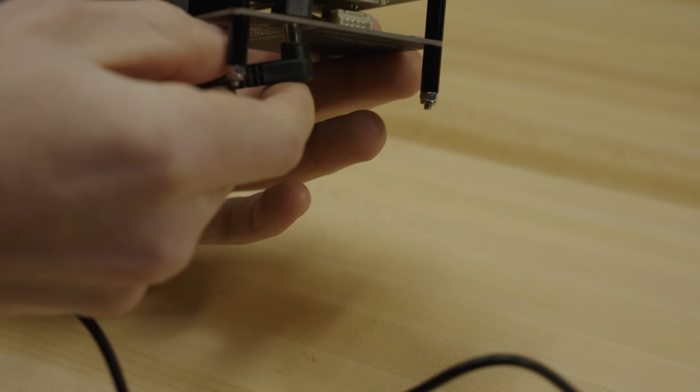This is something I built years ago. It's called the Pixel, and it's just a 16 by 16 LED matrix with APA102 2020 LEDs, which are addressable 2mm by 2mm LEDs. I was thinking, what if I made every panel of the mask its own LED matrix and made them out of circuit boards? I'm pretty sure you can get these LEDs way smaller now too.

So my plan now is to use individual addressable LEDs with individual circuit boards as each panel of the mask. The old mask is a little bit too complicated for that—there's too many faces and some are too small, it'd be impossible to solder. So what I need to do is find a more simple mask, find or make one. I think I know where I can find one, so that I can turn that into circuit boards and have it made at PCBWay, and make it that way.

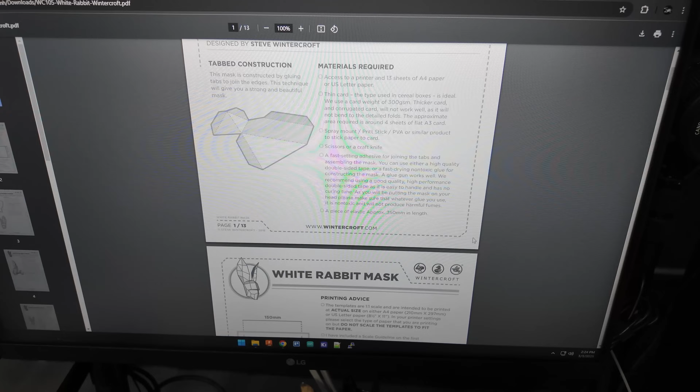I remember I found these really cool papercraft masks by Wintercroft. I wonder if they have anything. This is exactly what I'm looking for, just without the ears. So this is the mask that I purchased from Wintercroft, and I actually reached out to them and asked if I could use it for this project.

So you can see it's a bunch of paper templates that you print out, but that's not going to be useful for me. What I need to do is take those paper templates, somehow import them into Fusion 360, and then reassemble it in Fusion 360. The reason I need to do that is because I'm probably going to have to change some dimensions a little bit, and also I have to turn it into a file that I can import into KiCad so that I can put LEDs on it.

So what I'm going to do is kind of import them, mess around in Illustrator, make them so that I can import them as a sketch and then kind of extrude them and then go from there trying to put them together.

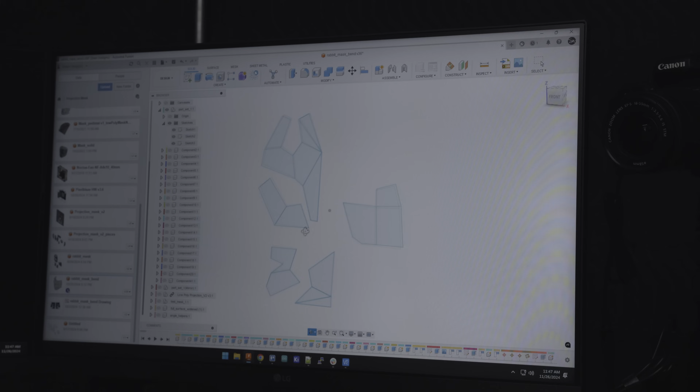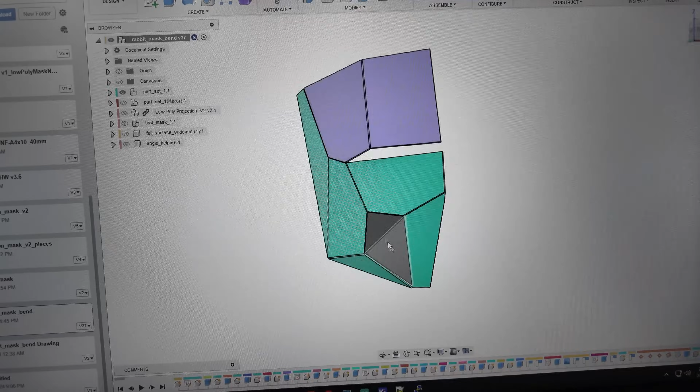And after piecing them all together, this is what I end up with. This is half of the mask. I had to recreate some of these, change their shape a little bit, because it's really hard to kind of assemble random angles. Like all these angles are just kind of, someone created it without thinking about the angles, so they're all like fractions of angles. So it's really hard to piece it together. When you're doing it with paper, it just naturally happens. But when you're trying to do it in CAD, it's like a nightmare.

So what happened was I got it kind of close, and then I would try and do some measurements, see if I could figure out the angle. And if not, then I just changed the piece slightly so that it fit together. So it's kind of working with planes and what you're given already, and then maybe making a new part to join and connect the dots basically.

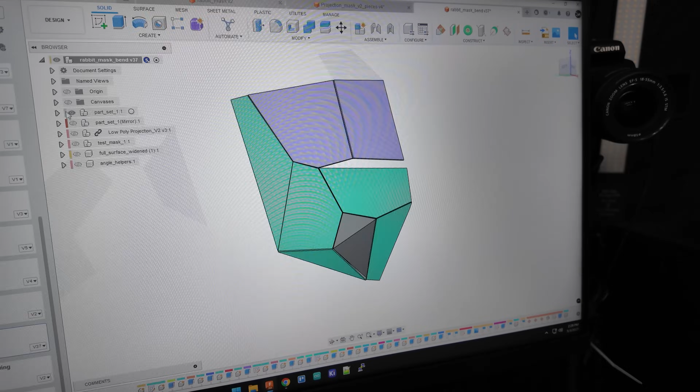So these are all individual pieces. But if I take all the surfaces, extrude them, then I can create an actual mask. So this is the test mask that I'm going to 3D print to make sure that it fits my face.

It fits. That's the reason why I 3D printed it, I just needed to make sure it fit my face. Imagine I made this whole mask and then it didn't fit. Plus it's going to be probably really fragile the way I'm thinking of building it. So now I actually have to take the mask that I made and convert it back into a flat surface.

That's going to be the PCB. I think I'm going to make a panelized PCB where each half of the mask is in its own panel. That way it still fits in my reflow oven and in my pick and place. And then I have to place where the LEDs are going to be. Okay, let me explain this a little bit.

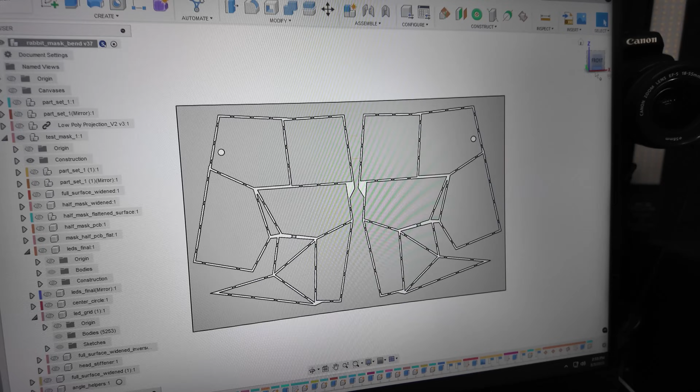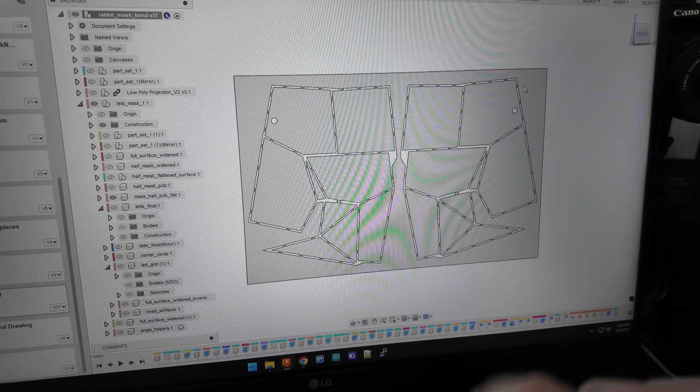This is the full mask, and I've just mirrored it, but each half is going to be a PCB. In KiCad, it's going to be really difficult to put the LEDs in a grid pattern on this. There is a way to do component arrays in KiCad, but for this specific case it won't really work because some of the grids need to be on a different angle to the PCB. So what I've done in Fusion is made a circle, a component pretending to be the LED, with dimensions of 1.234 millimeters.

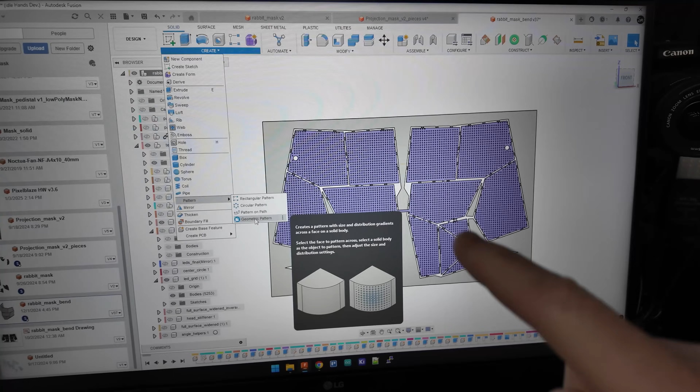And then I've created a grid pattern for each one of these using a geometric pattern tool. I think this is an upgrade feature you don't get for free, which is annoying, but I used it during the trial period. I'll probably never use it again, it's very specific. But what it does is allow you to put a grid pattern inside each panel that perfectly fits a number of LEDs with whatever spacing you want.

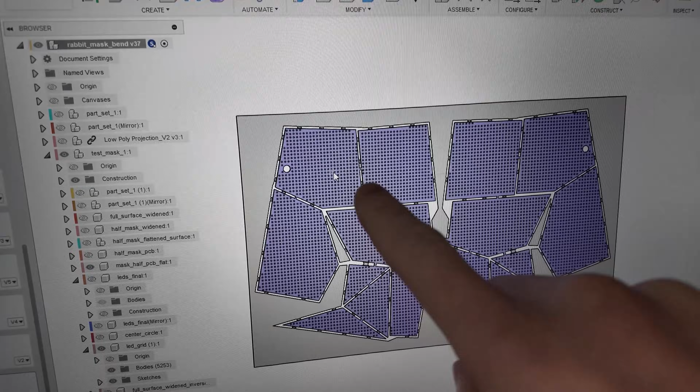So this is how I'm going to position the LEDs in KiCad. I'm going to make a script that converts that 1.234 millimeter circle into an LED component, and it's really not that hard to do. I exported a drawing from Fusion 360 as a DXF, the panel for the PCBs with all the circles on them. They were two separate drawings - the circles was one, and the PCB outlines was the other. KiCad accepts DXF files and you can import them as any layer you want.

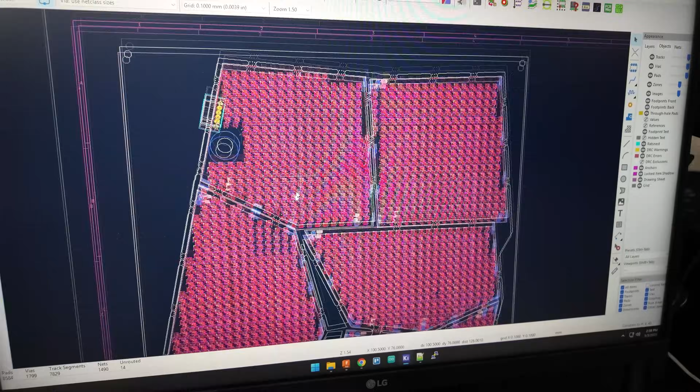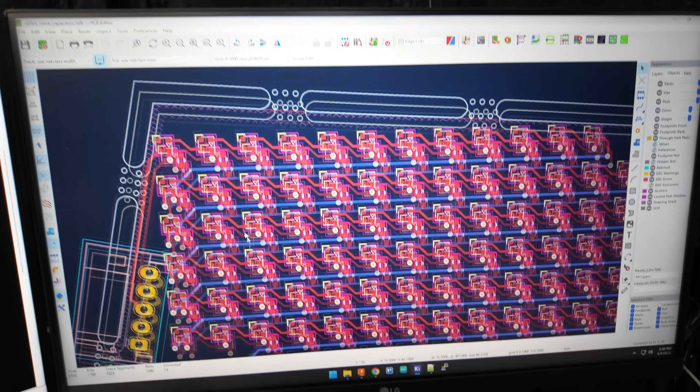One could be outlines, the other could just be a user drawing that doesn't actually do anything. Then I use my script that will go through, search for all the circles sized 1.234, find their center location, and place the LED component there. Once that's done, you end up with the board and the LEDs - this is a completed board, and it placed a circle at every place where the LEDs are now. I had to route this, but it was a lot of copy and paste since you can copy all these traces and place them on each one because they're all the same. You just do that a lot of times.

So now that that's designed, I've sent the files over to PCBWay, that's where I get all my stuff from - been using them forever. Hopefully they'll be here soon.

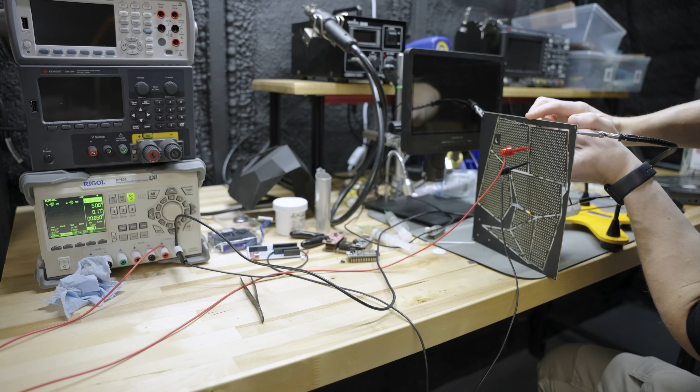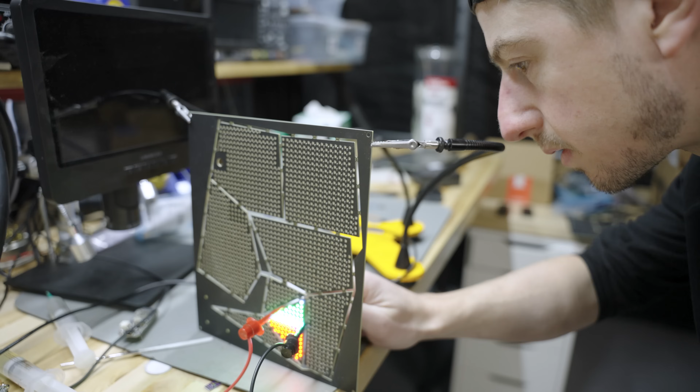Only 2 broken on this whole panel? How is that possible? Well, one's missing, and this one I can just tell isn't connected to one of the pads. That's it - out of this whole thing, it worked. That's insane.

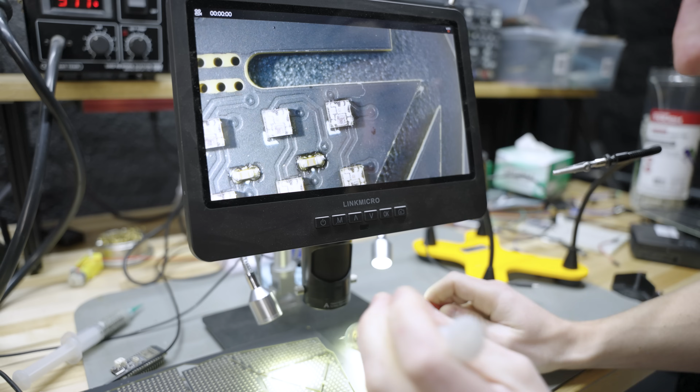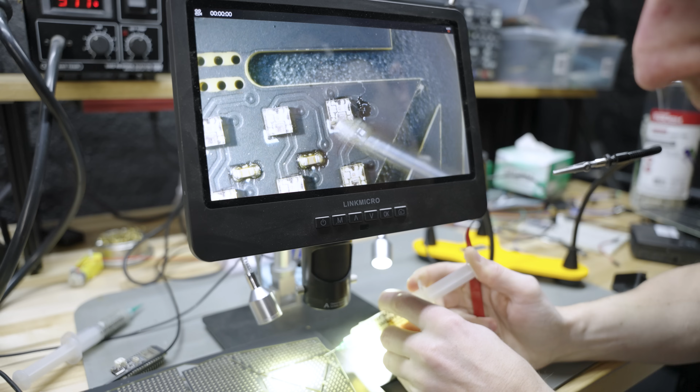This one right here isn't lighting up, I think it's that one. Yes, that one. So we'll hit it with rework. Sucks because on these matte black boards, they look so good if you don't have to do any rework, and as soon as you do, they look terrible in that spot because the flux is so hard to clean. But I knew there was going to be at least a couple, and I'm really happy there were only 2.

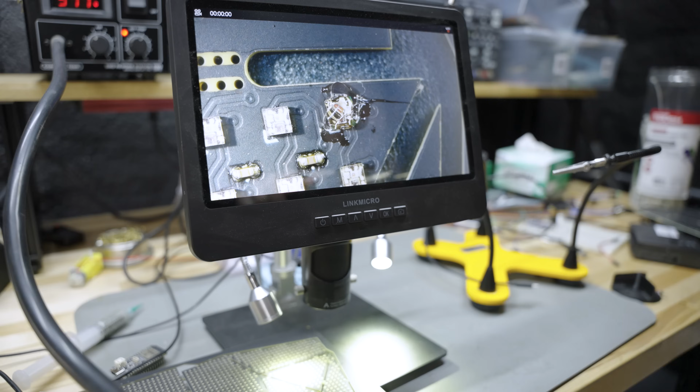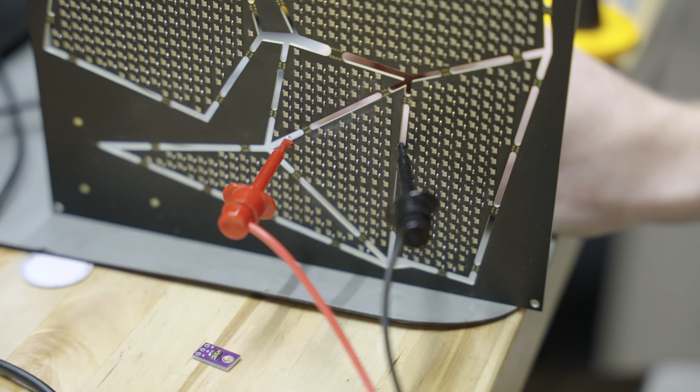You can do it, reflow any second now. There we go, that should be good now, if I didn't fry it. Okay, let's see if that bottom one is working now. Yep, that one's good, let's check the other one. Connected, and yes, that's all of them. On to the right side.

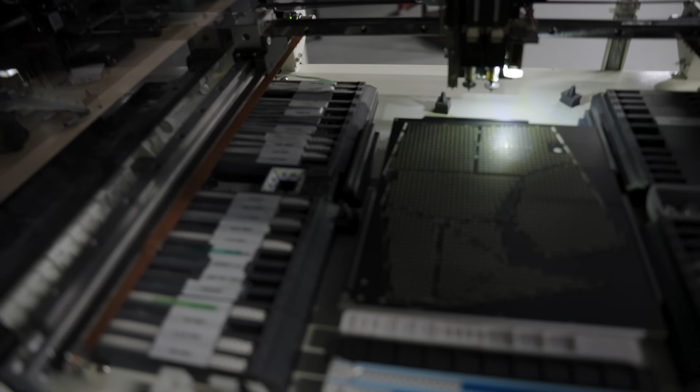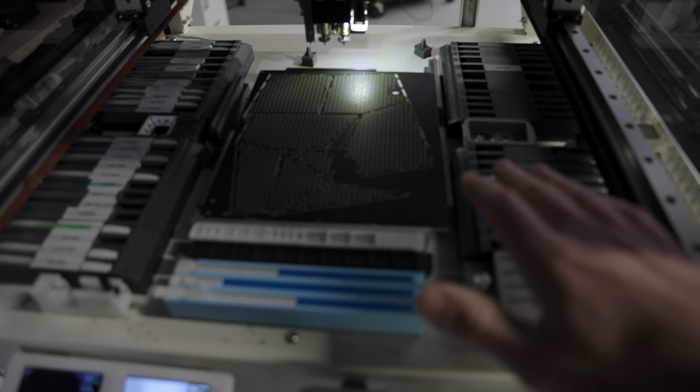Alright, it's done the second one. Now this machine is kind of annoying - it works great for small, simple boards, but it's got little issues that make doing a big board really frustrating. About halfway through it started throwing the LEDs. The tape isn't retracting properly, pulling it forward, so it occasionally throws one or puts one upside down. Really annoying because with so many, you have to check them all, and it doesn't detect when that happens. It happened on the other one too. I don't know what's going on, but it's ready to reflow.

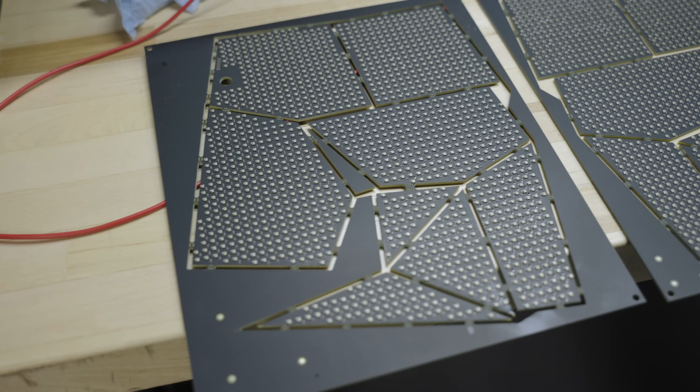Okay, it's kind of funny, I actually don't know the exact number of LEDs. I mean, I could find out easily, but it's like 3,000 or something. And then all the capacitors.

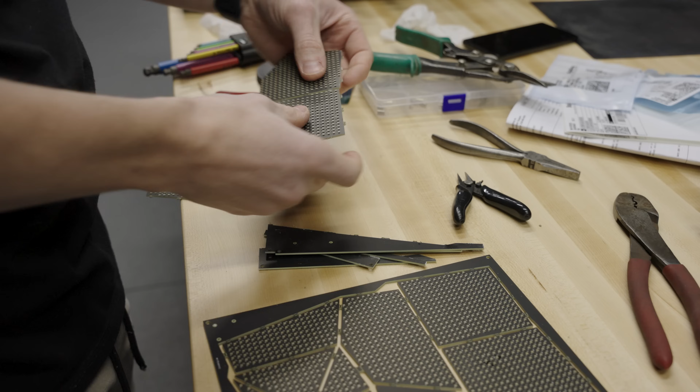I'm about to do something extremely terrifying. Belt grinder meets circuit boards.

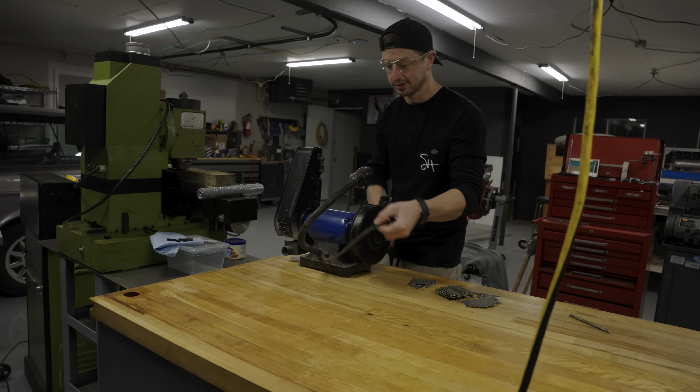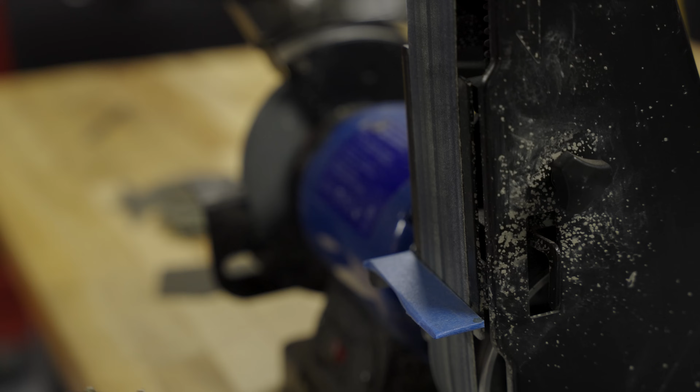These little mouse bites on these boards, these are ones I haven't removed, but they also leave a couple little spikes. The problem is I'm soldering these boards together, so even the little bumps will be too much. So this all has to be flat, and this is the best way to get a flat surface. It's not as violent as it sounds and looks.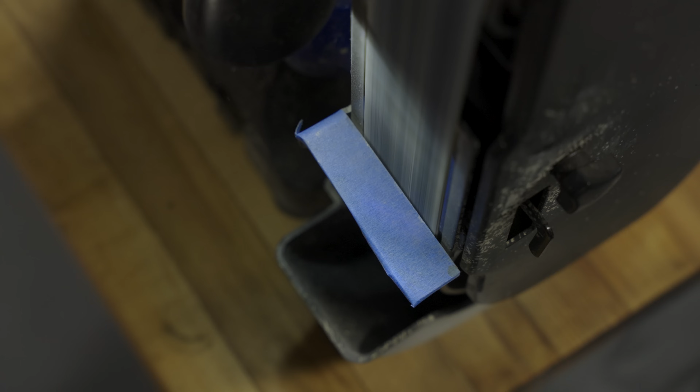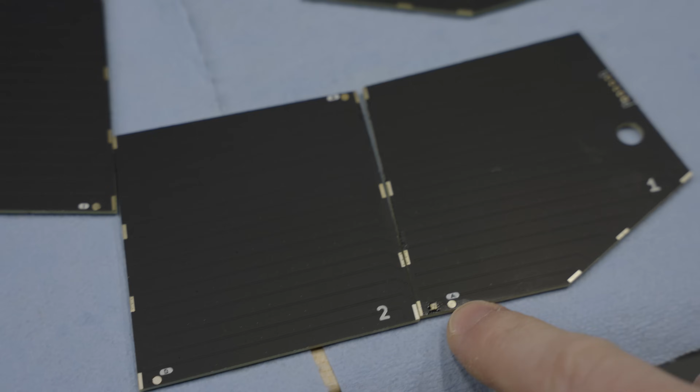Okay, you see these tabs? The way I'm going to mount them together is by soldering them at whatever angle they need to be. I 3D printed some angle gauges so I can hold them at the correct angle loosely, then I'll solder these together. These are the power and some of them are ground, so that's how they transfer power across. For the data, because they didn't line up and it was going to be messy, I just put a solder point on each one, and I'll run a small wire from here — see, it says A to A, and they're all labeled.

It's like welding, but with solder. And way more fragile.

All right, we got both halves. Check this out. This will be the final connection. Oh yeah.

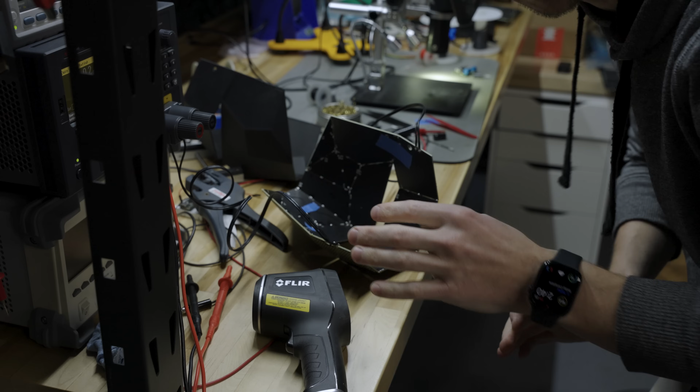I wonder if it still works. Okay, so I powered it up. It's all connected except only half the mask has the data wires. Anyways, I powered it up and kept having to turn the amperage up. It was weird because I calculated it should be around 1.5 amps for just the mask being off, but I was getting up to 3, then hooked it up to my giant power supply and went all the way up to like 8 amps, being really cautious. But there's definitely a short somewhere, and I was kind of panicking because it could be anywhere.

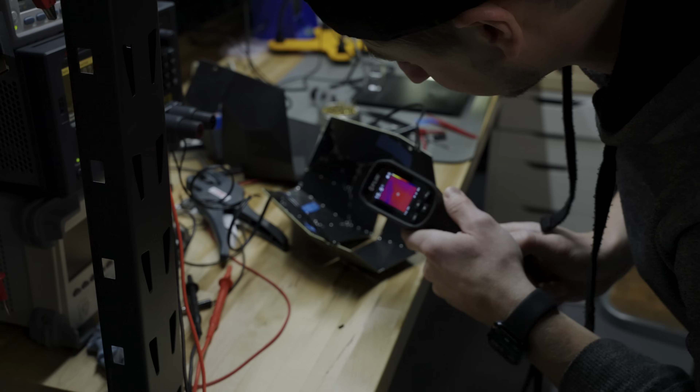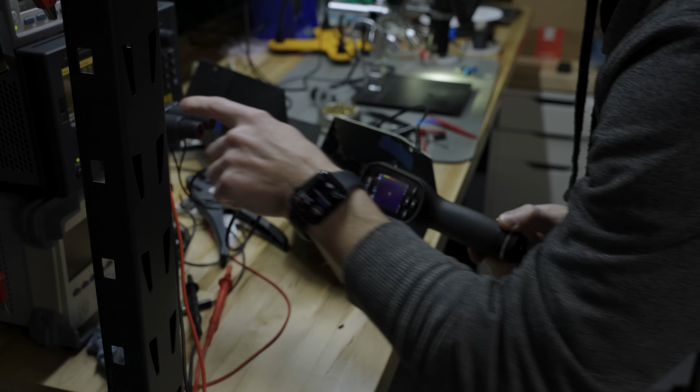I tested all the LEDs, but it's probably one of these solder connections. I've been searching, and I finally found this one solder joint. It puts out a little more heat at 8 amps, and that's definitely it. Let's see here — it's somewhere between these two. Yeah, definitely. Where is that?

I gotta set this up on a tripod. So this is a ground, and this plane is a power plane. When I sanded the edge, it must have gotten some copper from the power plane, and then when I soldered it, it created this little tiny bridge there. There might be other ones, but at least I know how to find them.

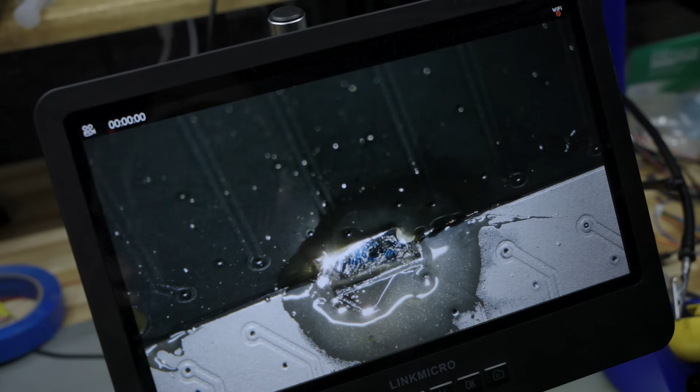Actually, I just noticed one other thing. It's probably not all the pads, because on the mouse bites, I remember this one mouse bite was close to the ground pads. It's the only one I did that, and I didn't think it'd be an issue, but the mouse bite made the copper come slightly further down, whereas along the edge of the board it's slightly recessed. That's why it became a bit of copper when I sanded that off. It shouldn't be an issue anywhere else since these aren't close to any other mouse bites. We'll see — that should do it.

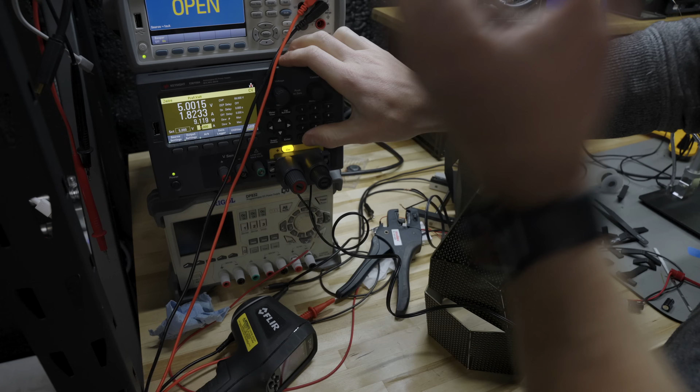So now it's powered on. All right, we got 5 volts. There's no smoke, 1.8 amps, and they're all off. Crazy.

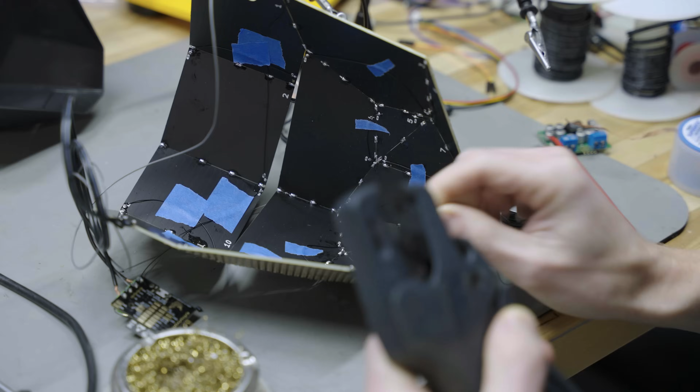So you can see I've added the wires that connect each panel. It's a bit messy, but I've got some hot glue in there to hold everything down.

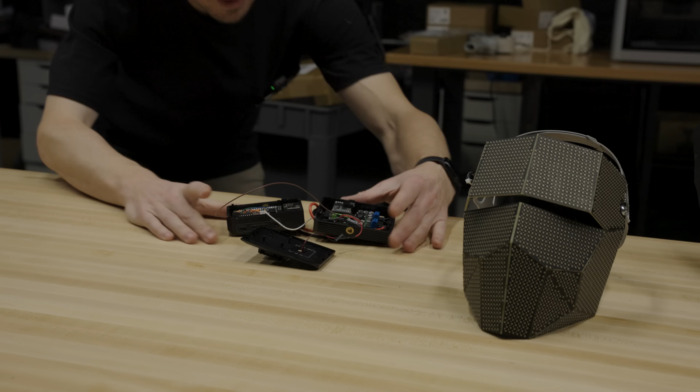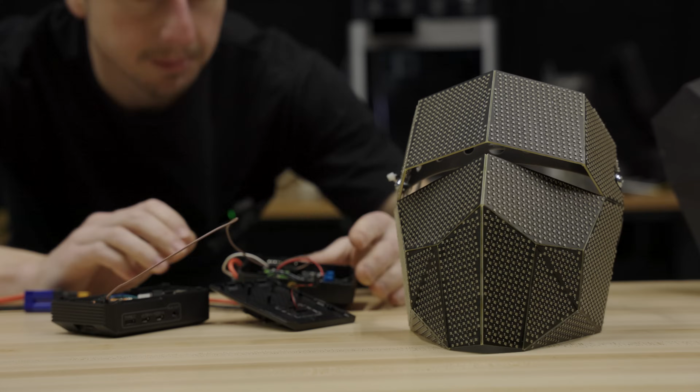I've been so focused on the build of the mask, worried whether it would work or not, that the controller was basically an afterthought. Since these are just addressable LEDs, there's a thousand ways to skin this cat. So I threw together two different ways of controlling it with components I had lying around. This box contains a high current Pololu 5-volt step-down regulator and a board called a Pixelblaze — these two parts here. The Pixelblaze is a really cool and convenient addressable LED controller. It lets you map and control your addressable LEDs really easily.

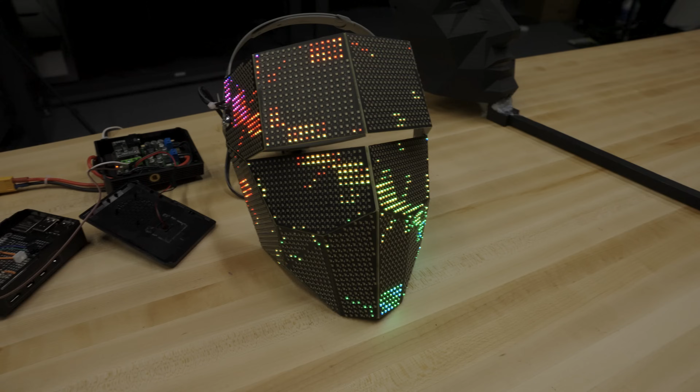The mapping part is important because the mask has a really strange arrangement of LEDs. This software lets you assign each LED to the correct XY position on where it should be on the mask. It's really hard to do, but this works pretty well. For example, on a regular LED matrix, this could be LED 1 — this is always LED 1, and this one's always LED 16.

If we imagine the mask is split in the middle, this could be LED 1, and this could be LED 200 and something. You'd think on a regular panel it would just go around this way, but that's why the mapping is important, because each one of these is its own matrix. So it goes 1, 8, 9, 20, 21, until the panel ends, and then it starts on the next panel where the wire goes. This one goes its own panel, and then down here.

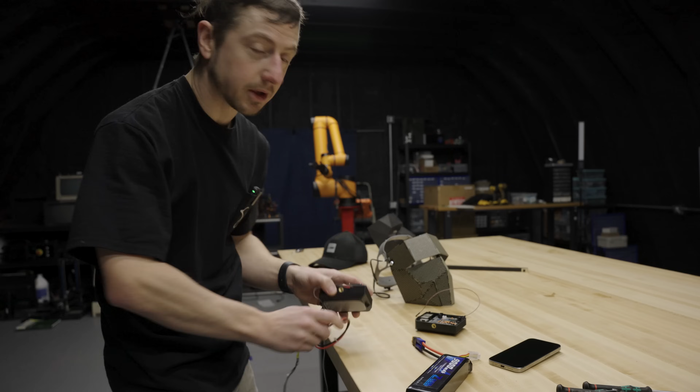It's pretty complicated. So I added this belt hook and this giant 3S battery, and I'm ready for 9 hours of face warming goodness.

Does get kind of toasty in here. These are sound reactive.

Spectrogram. The microphone is behind me, so it's not picking me up very well. But it also has an audio port, so you can actually have direct sound without having to run an analog mic.

There's one problem with the Pixelblaze: it's not easy to display images and videos on it, which is somewhat of a necessity. That's where the Raspberry Pi comes in. As a test, I connected just a standard logic level shifter so I could control the LEDs with the Raspberry Pi. Actually, this is the one I ripped off the Christmas tree of death.

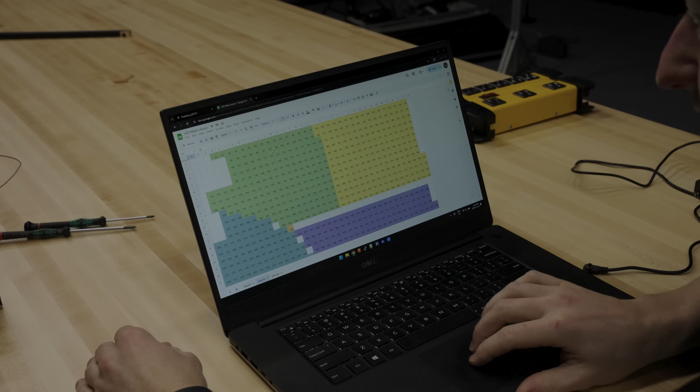I used Google Sheets to map the locations of the LEDs. This actually took a really long time.

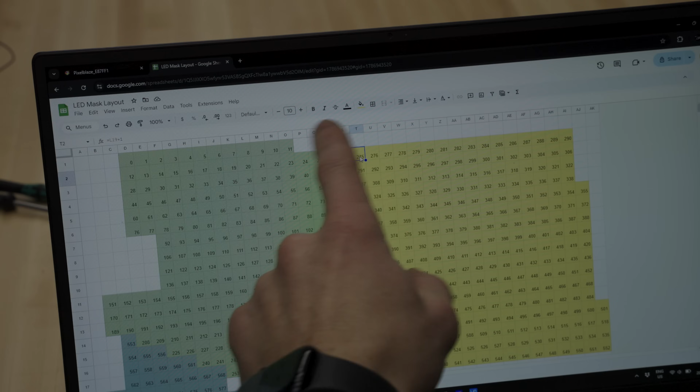If you imagine this whole thing as a grid, this is half the mask. This is actually LED 00 in position, but there's no LED there, so you can't call that LED. So then the first LED right here is actually at 04, or 40. You have to map them in order, but if you want to call this LED T2, then you actually have to call LED 275. So you have to go through them all - if you want to send a white value here, you have to send it through all these and up to this one. That's why this took me so long to figure out.

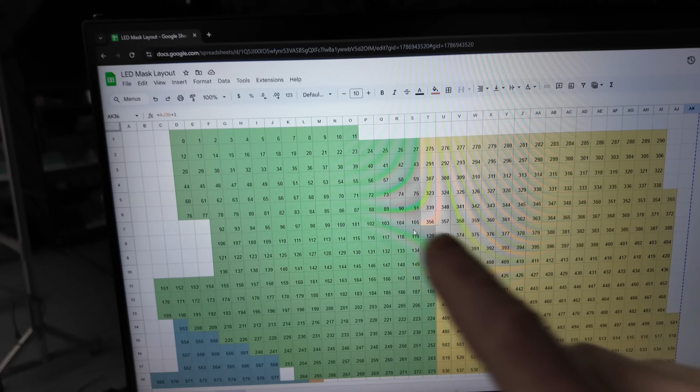Now that I've mapped every pixel on the mask, which took forever, this one here is actually on the inside of the mask facing your eyes, if you want to make your eyes light up. I don't think I mentioned that.

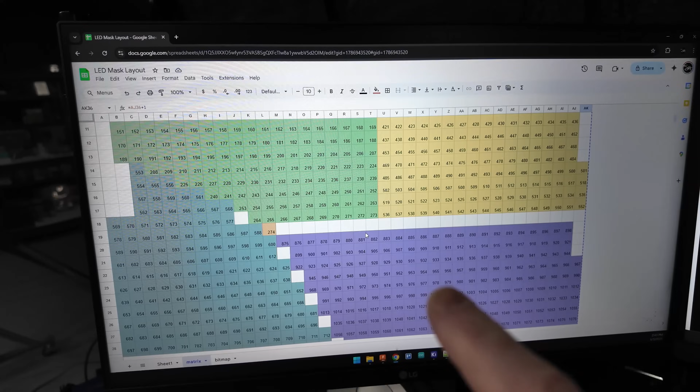Anyways, take all this from your Google Sheet - there's this website that has a converter that will take the Google Sheet and convert it to a Pixelblaze map. I've pasted it into this spot here, literally copy and pasted from the Google Sheet, and now you can see half the mask.

That's what it would look like if you were running this rainbow pattern now on half the mask. So basically I'm treating half the mask as just a flat plane, but trying to skew it in a way that still works, because it's not exactly projection mapping - it's just making cool colors. It'd be a whole other ordeal if you were trying to put a face texture on the whole mask.

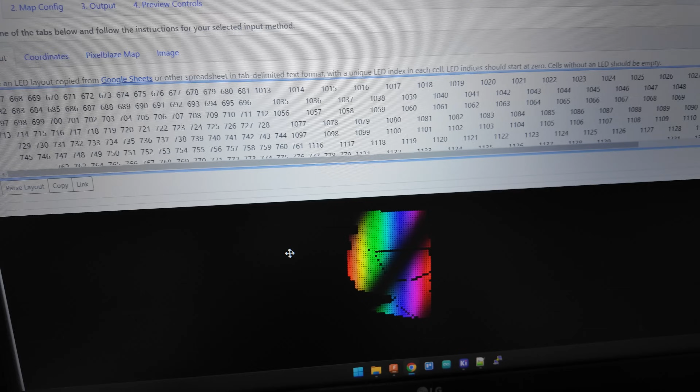So you take this and get your output for Pixelblaze, and it just tells you - you actually just copy and paste this right into the Pixelblaze config, and it gives you this shape.

But wait, I forgot one thing - I actually have to convert that to recreate it on the mirrored side. So I just made a quick little script to do that in Python again. And then you have the mask in Pixelblaze.

I also created a Python script that correctly maps the pixels of a video file to the mask. It runs at about 8 frames per second, which is good enough. To run the video, you need a PXL file, which is basically just the map, so you can change that file if you have a different map pattern. And then you just need the video file, and when you run it, it displays on the mask.